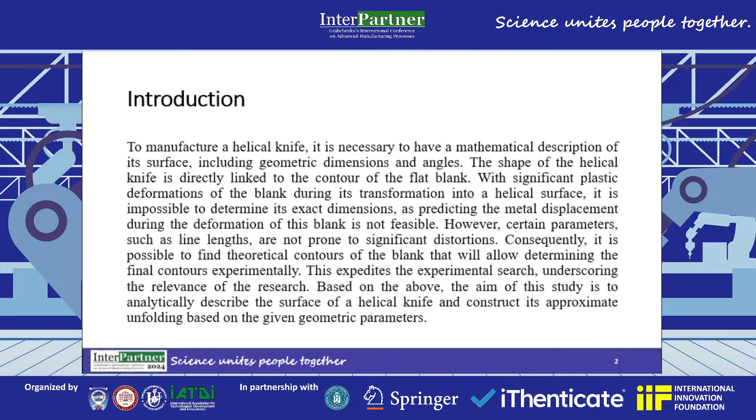According to the given geometrical parameters, we describe analytically the surface of the helical knife and construct its approximate sweep. The cutting edge of the helical knife is a helical line that convexly lies on the surface of a cylinder with radius r and has a constant inclination angle tau relative to the horizontally positioned cutting blade (figure 1). The cross-section of the knife is a straight segment inclined at an angle phi to the radial direction (figure 1b). Decreasing the angle phi deteriorates the cutting process, but increasing it also has limitations.

With the drum rotating uniformly, a layer of plant mass with thickness h moves with a constant speed v in the direction of the knife (figure 1c). Cutting of the layer starts at the top and ends near the cutting plate. As the layer is not cut simultaneously throughout its thickness, but gradually, the profile of the cut layer will be outlined in the form of an Archimedean spiral (figure 1c), shown inside a circle with radius r. Considering the thickness and sharpness of the knife, it should not touch the spiral.

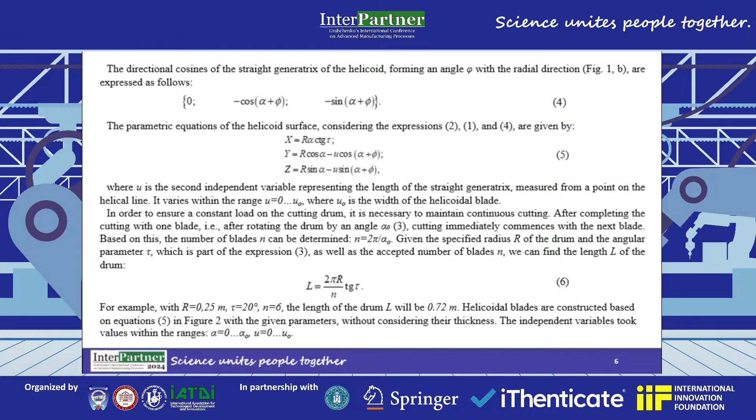To manufacture an individual blade, a flat blank is required. Its contours should be such that plastic deformations are minimal when the blank is deformed into the final product.

To find it, we assume that the length S of the outer edge of the blade, and the length of the inner edge S, as well as the width of the blade U0 on the flat blank, are equal to the corresponding dimensions of the helicoidal blade.

Its length is found using a known formula 7. The length of the inner edge of the blade can also be determined if the radius r of the inner circle is known, figure 3a.

The radius r is a side of a right angle triangle defined by two other known sides r and u0, and the known angle phi between them, figure 3a.

Equation 8. The length of the arc corresponding to the inner edge of the blade is found by multiplying the radius r by the corresponding arc angle alpha 0, formula 9.

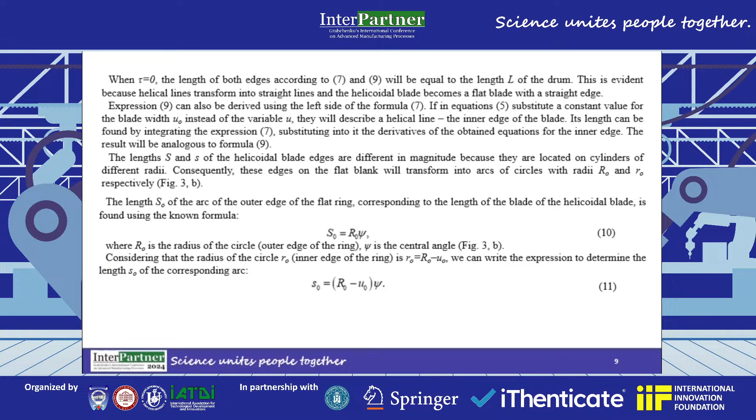In figure 3, you can see a graphic illustration for the calculation of a flat blank for the helicoidal blade: A, schematic of the blade on the drum with indication of its parameters; B, flat blank of the blade with indication of the necessary dimensions.

By equating the lengths 7 and 10, as well as 9 and 11, we obtain a system of two equations with the unknowns R0 and psi. Solving the system for these unknowns, we get formulas 12 and 13.

For this purpose, parametrical equations 5 for a direct open helicoid were initially developed, incorporating the design parameters of the blade and defining the limits of the independent variables considering the dimensions of the blade.

Formula 6 allows the determination of the drum's length based on the number of blades, drum radius, and the angle of inclination of the helical line cutting edge to the drum axis.

To determine the shape of the flat blank, the assumption was made that the length of lines outlining the contour of the blade in space and the corresponding lines on the flat blank are equal.

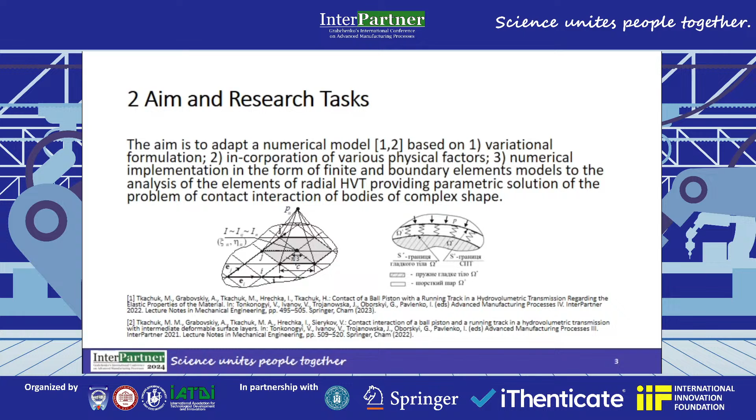A variational approach is applied to the analysis of contact interaction of bodies of complex shape, based on minimization of either the potential energy or the complementary energy. Quadratic terms need to be added in order to account for the local deformations of the intermediate surface layers.

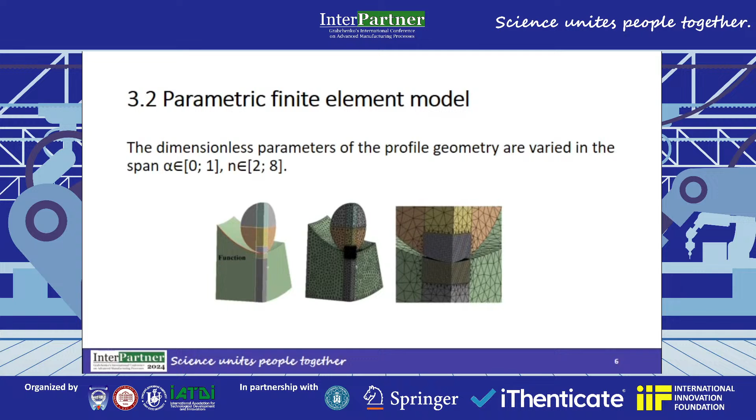The particular shape of the profile is defined by a power function chosen in the present analysis. The dimensionless parameters of the profile geometry are varied in the span for the radius between 0 and 1, and for the exponent of the power law, n, from 2, which is quadratic, to 8.

The running track profile geometry is evaluated based on the reduction of contact pressure and the equivalent stress.

For the reference case of a quadratic profile, which corresponds to n equal to 2, we can obtain the Hertzian contact, that's the case of alpha equal to 0, for which the contact is only implemented in the center and is pointwise. For growing radius of the running track profile, we can obtain a more elongated contact spot. With further increase of the radius, the contact may transform from the center to the edge of the running track.

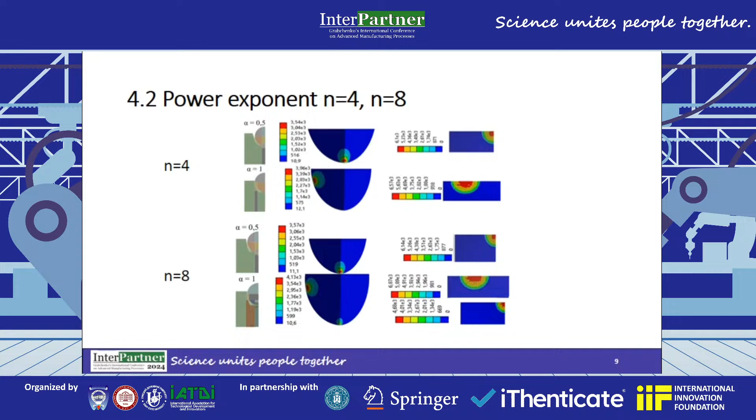For higher power exponents n equal to 4 and n equal to 8, we will obtain either a pointwise contact in the center or the edge contact.

The apparent optimum at alpha 0.5 and n equal to 2, which displays the lowest contact pressure and equivalent stress values, requires cutting the groove too deep. This will cause interference between the rotor block and the inner wall of the stator.

The feasible domain of the design parameters does not cover the entire parameter space, and hence the optimal design solution will be found somewhere on the boundary of the admissible parameter space.

To conclude the talk, we can summarize that the developed models, methods, and analysis tools for contact interaction of contacting complex-shaped structural elements have demonstrated their utility and effectiveness.

The parametric approach is based on the variable analysis of design solutions according to the strength criterion. This makes it possible to validate progressive technical solutions of these structures. The developed analysis methodology can be applied to other machine components that transmit high loads through the contact interaction of complex-shaped working surfaces.

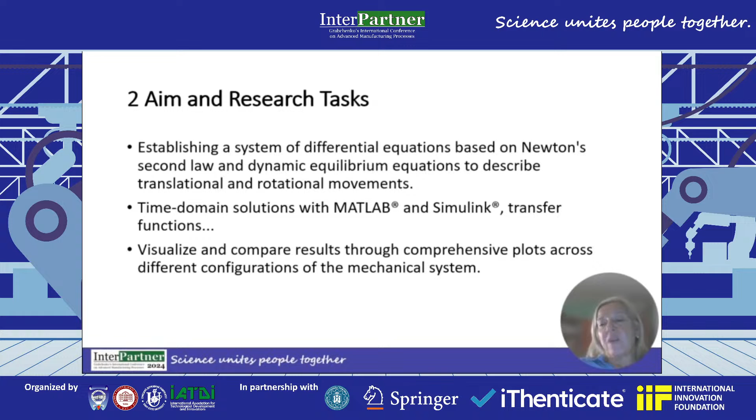At the end, we visualize and compare results for comprehensive plots across different configurations of mechanical systems.

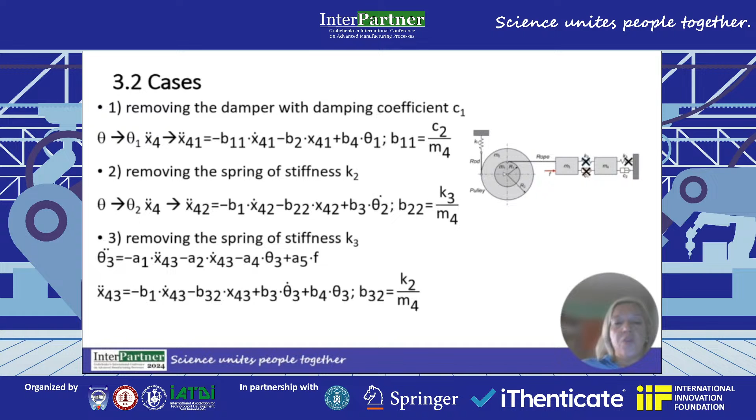After that, we integrated all these equations in the Simulink environment, making a model with zero initial conditions and with some blocks which are induced to connect MATLAB and Simulink with these Simulink blocks for each of the cases for theta and each of the cases for x.

In order to get angular displacements in degrees, we have also induced gains for this.

After that, we converted the differential equations from the mathematical model into a complex model in order to obtain the transfer function. We have used Laplace transformations on the left and right sides, and the transfer functions of the system are calculated.

After that, some characteristics of these transfer functions are used, properties such as poles, zeros, and gain factors determined in MATLAB. The dynamics of the system in terms of stability is also tested in MATLAB, and we have used the Nyquist and Bode stability criteria.

Running the MATLAB scripts as the result produces some plots for all presented cases. This is the Pulley rotation displacement.

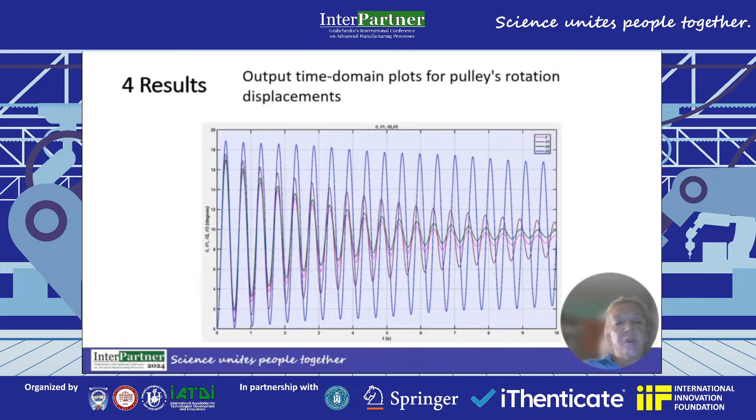The transfer functions for all observed systems are also calculated, and we can see that the most complex expressions are for the initial case and for case 3, where the denominators are polynomials of the fourth degree, and accordingly both systems have 4 poles. In cases 1 and 2, we have more simplicity and a polynomial of the second order.

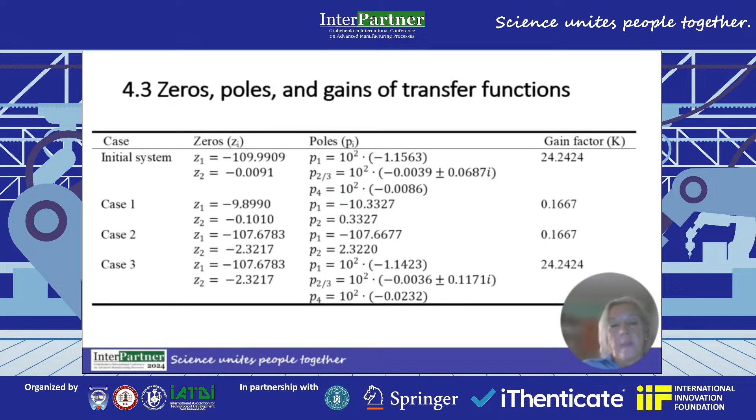Finally, due to the fact that Nyquist curves do not include the critical points, we can conclude that all the systems will be stable after closing the feedback loops, with one or both margins. We can see here on the Nyquist diagram, gain and phase are infinite on each both diagram, which means that the system will always be stable no matter what the gain increase is.

For the initial system, the bode phase plot crossover frequency is 8.33, and for case 3 it is 12.6 degrees. For the system in case 1, the bode magnitude plot displays 26.3 decibels for gain margin, with the gain crossover frequency equal to 0.

Finally, we have some conclusions. We have various configurations of the system investigated by deriving mathematical models for each case and simulating their time domain responses using MATLAB and Simulink. We have explored the impact of removing elements such as springs and dampers on system dynamics. We have also conducted some analysis in the complex domain, and all the systems remain stable even under conditions of increased gain, when all the feedback loops were closed.

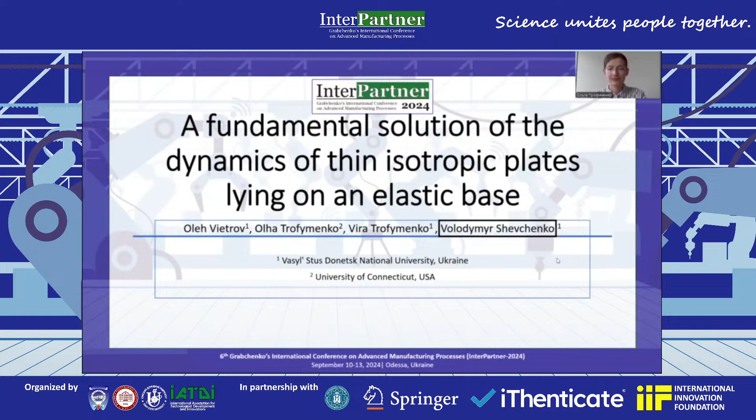Thin-walled structural elements in the form of plates are widely used in modern mechanical engineering, construction, shipbuilding, and aviation, and the requirements for the properties of such structures are constantly becoming more complex. Structural elements can be made from modern anisotropic materials with special mechanical properties.

We have h, the thickness of the plate, which is small compared to the dimensions of the base. We assume that the thickness of the plate is constant.

According to the specified criterion, plates can be conditionally divided into the following groups: membranes, stiff plates, moderately thick plates, or thick plates.

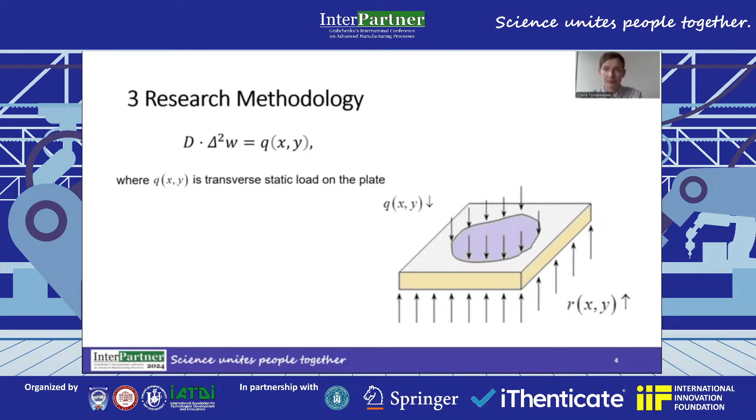Let's demonstrate an algorithm for constructing a fundamental solution to the equation of the Pasternak model. The algorithm proposed in this work for constructing the fundamental solution of plate dynamics is based on the joint use of the Fourier and Laplace integral transforms and the theory of special hypergeometric functions.

An effective method for constructing a fundamental solution to a partial differential equation is the method of integral transformation. Since equation one depends on 3 coordinates, in accordance with the methodology to solve, we will use the formula for the direct Fourier transform and also for the direct Laplace transform, as you can see on this slide, for F and L. The use of integral transformations allows us to not overcomplicate the mathematical specifics of the delta function.

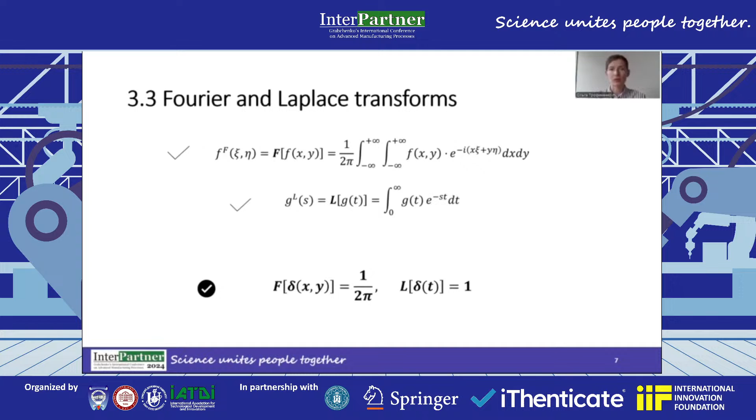Why? Because we have this perfect result. In this case, for the Fourier transform, in case of the delta function, we have just 1 over 2 pi. And for Laplace, we have just 1. So if you have this result in relation to equation 1, Pasternak model, basically, as I said before, the transformant of the dynamic deflection function of a thin plate will have the form like the first formula on this slide. But basically, we will move to the next formula at the center of the slide for WRT.

And we can see this representation using the inverse Laplace formula. And also we have the improper integral as well as the J Bessel function of order alpha. And here also, interesting is that R's are polar coordinates in this case.

If you use for the Bessel function the power series and also the Efros theorem, we will have the next representation for WRT. Again, we have the inverse Laplace transform, but it seems like a more complicated structure in this case. So we'll use the Efros and Danilevsky formula, famous formula. Why? Because we have the same structure in our formula and at the left side for Efros Danilevsky. And basically we will have the gamma and the R, and we will have the Bessel function again at the right side.

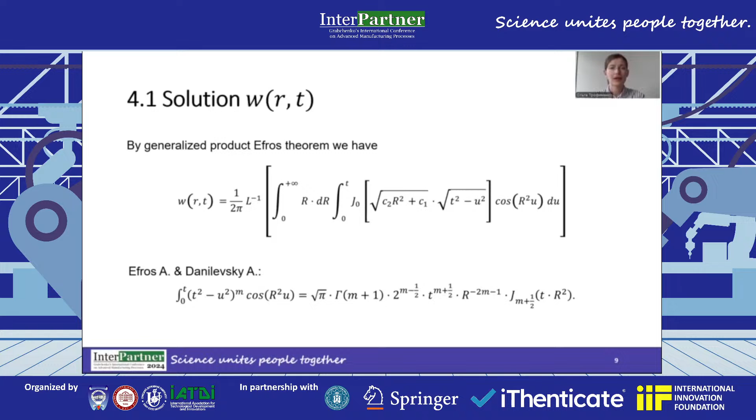Also, it's interesting that we can use a technique for calculating improper integrals, and we are interested in a special expression like at the left side here. So for this expression, we would like to use the improper integrals specifics, and we will have at the right side the most interesting part here. Basically, it's the Meijer G function now.

Also, it's interesting that in some case, when C sub 1 is 0, it means the lack of an elastic base, we will get this solution. Like we can see, it seems a more simple solution for R, for WRT, but it's only for the case when C sub 1 is 0, and it's a famous result from Zhigalko and Sadykova. So in this more simple case, our formula works.

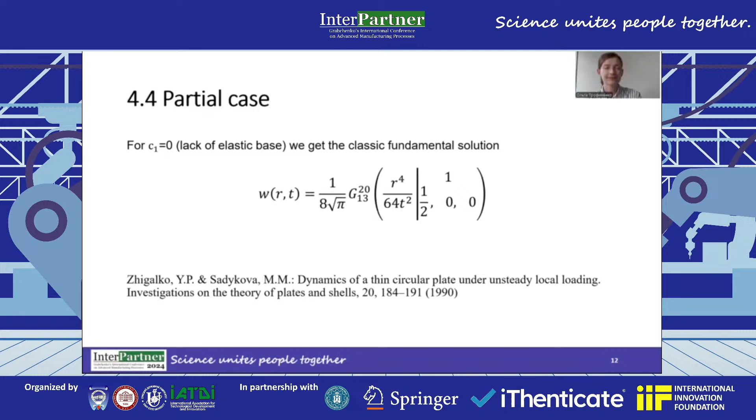As a conclusion, the fundamental solutions to the equations of dynamic deflection of thin isotropic plates lying on an elastic base were obtained. We used the method of integral transformations of Fourier and Laplace, the theory of special functions, and the method of analytical calculation of improper integrals by Maillard.

Also, at the end of our presentation, we would like to say that the presented work is a development of the methodology of academician Volodymyr Pavlovich Shevchenko, and this paper is one of his latest studies. Volodymyr Pavlovich passed away this April, and we would like to dedicate this presentation to him. Thank you very much for your attention.

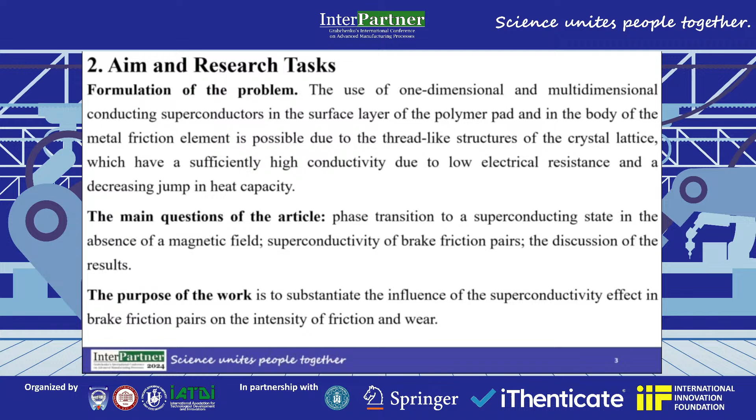In this case, the heat of transition is zero. Thus, the transition of the superconducting state in the absence of a magnetic field is a phase transition of the second kind. From Formula 1 given in the article, one can obtain the values of heat capacity in the superconducting and normal states. This relationship is confirmed by experiment.

The thermal diffusivity was determined by dependence 2. With a jump in heat capacity in the superconduction, the thermal diffusivity will increase by 2.5 times.

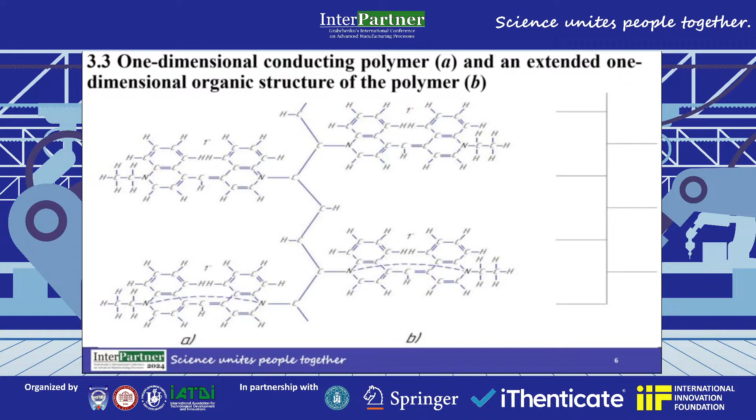According to the band theory of solids, the state of an electron is characterized not by any, but by quite specific discrete energy levels, similar to the electron levels of an isolated atom. These discrete levels have an important feature. They fall into groups called zones.

Based on the results of theoretical and experimental studies of the state of superconductivity in friction pairs of braking devices, it was established that the entire body of the metal friction element and the surface layer of the polymer lining have superconductivity. A special role is given to the so-called thread-like structures, which have a high thermal conductivity coefficient, 3-5 times higher, due to low electrical resistance.

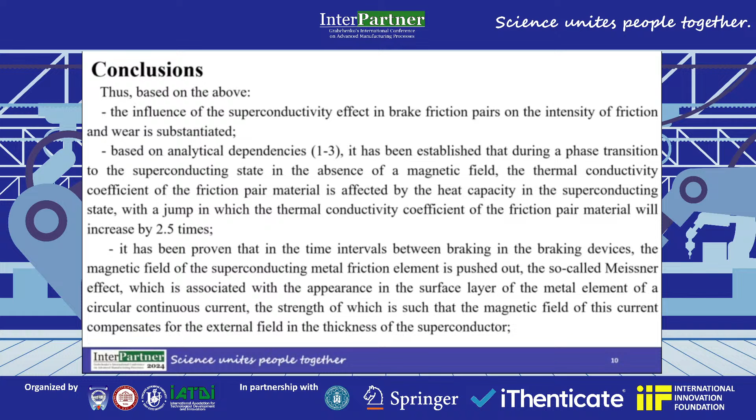Thus, as shown by the studies presented in this paper, the superconductivity of a metal element is affected by the deformational and polarization states of the crystal lattice and the electron system of the metal, which lead to interelectronic attraction and, as a result, contribute to the establishment of a superconducting state.

The study of superconductivity in friction pairs in braking devices will subsequently lead to a recommendation to reduce the wear of friction materials of friction pairs by 20%, which will lead to their more efficient operation.

The results of theoretical and experimental studies can be used in design offices and factories, as well as in further developments of friction pairs of brake friction units.

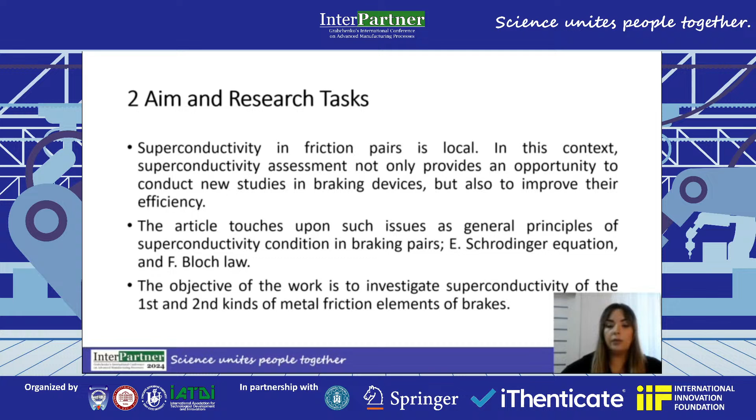So what are the aim and research tasks? Superconductivity in friction pairs is local. In this context, superconductivity assessments not only provide an opportunity to conduct new studies in braking devices, but also to improve their efficiency. The article touches upon such issues as general principles of the superconductivity condition in braking pairs, the Schrödinger equation, and the Bloch law. The objective of the work is to investigate superconductivity of the first and second kinds of metal friction elements of brakes.

Large currents will contribute to the emergence of the local superconducting state of the metal friction element. On the inner surface of the ring, magnetic lines will also appear.

So, what are the general principles? Superconducting substances are prone to heat transfer processes and are capable, for example, of strong cooling with relatively small heat losses. When the temperature of the superconductor becomes equal to the critical temperature, the transition to the normal state takes place and the thermal capacity begins to change according to the linear law.

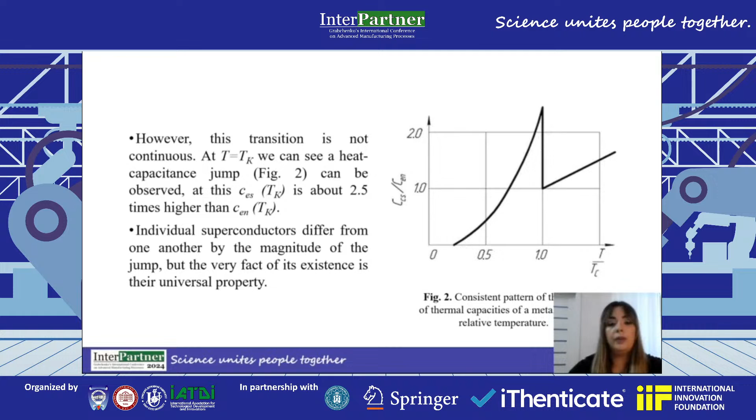However, this transition is not continuous. In figure 2, we can observe the heat capacity jump. Individual superconductors differ from one another by the magnitude of the jump, but the very fact of its existence is their universal property.

Here are some conclusions. The electrothermomechanical friction interaction in the brake pairs is considered, in which an electric current is generated, which contributes to the formation of magnetic annular lines around the cylindrical metal ring, presented as drum and pulley rings. Theoretical studies of the superconductivity of metallic friction brake elements have allowed us to identify two groups of superconductors and to describe different interactions within the working surface.

The state of superconductivity of the first and second kind of metal friction elements of braking devices is estimated. The obtained results can be applied in the development and optimization of friction systems, in particular in the study of shoe brakes of disc-drum type drilling winches.

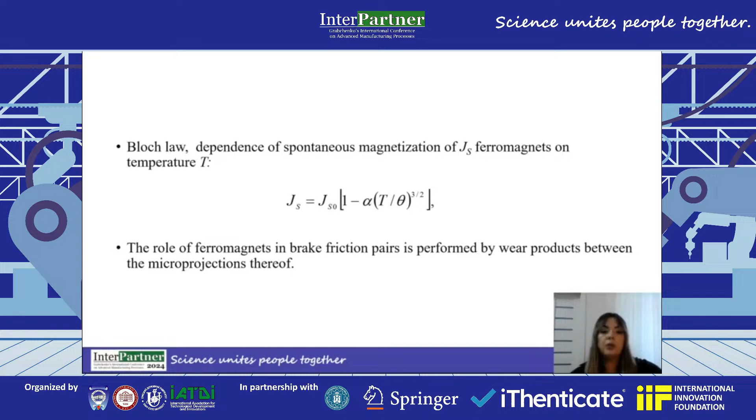Here you can see Bloch's law, the dependence of spontaneous magnetization of ferromagnets on temperature. The role of ferromagnets in brake friction pairs is performed by wear products between the microprojections thereof.

In the long-term braking mode of the drum brake, superconductors of the first kind lose superconductivity in the field, when the field jumps into the body of the drum frame, and the latter, in all its volume, goes to the normal condition. At the same time, the specific magnetic moment also decreases by a jump.

And the results: for space-limited systems, the solutions exist only for discrete energy values. These values are numbered as integral quantum numbers, and each of them corresponds to a wave function.

The Bloch law describes the dependence of spontaneous magnetization of ferromagnets on temperature and is well respected at temperatures well below the Curie point. The decrease in magnetization with increasing temperature is explained by the disorder of the ordered orientation of magnetic moments of matter under the influence of thermal motion of particles.

The role of ferromagnets in friction pairs of brakes is performed by wear products between microprojections.

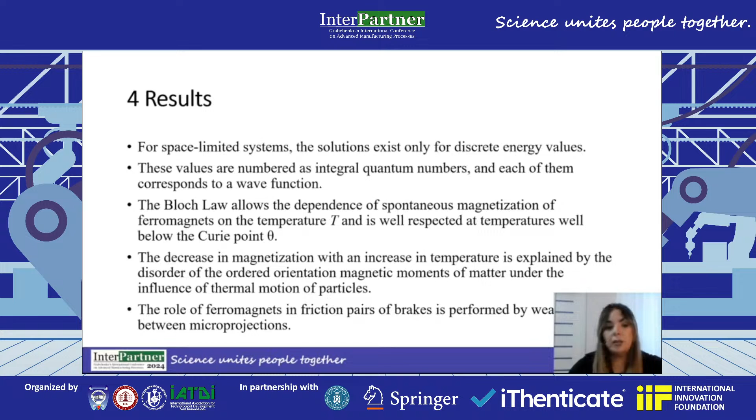The results of theoretical studies of the state of superconductivity of first and second kind at low and high temperatures of metal friction elements of brakes have revealed the following. The first group includes so-called superconductors of the first kind, characterized by positive surface energy. Negative surface energy characterizes the superconductors of the second group.

Third: the lower layers located on the non-working side of the surface experience internal interaction between the paired Cooper electrons and the crystal lattice.

Next, electric, magnetic, and thermal gradients decrease in size from external to internal effects. Finally, the presence of different types of contacts and their transformation, connected with electrical resistance, promoted superconductivity of the local character of the first kind.

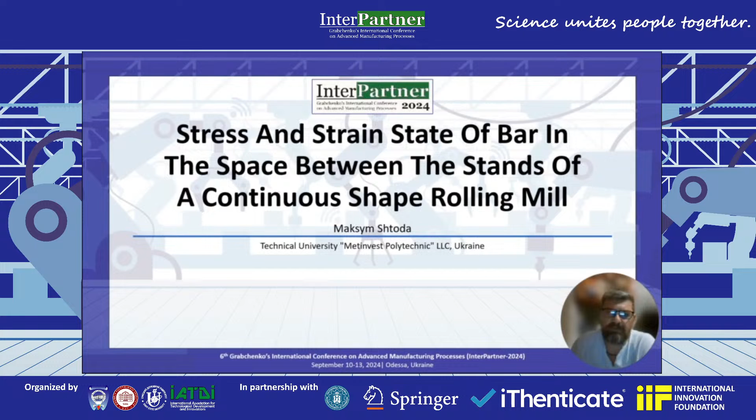The continuous rolling method is currently the most common in producing long products. It is known that the distinguishing feature of continuous rolling is the simultaneity of deformation in several successive stands of the mills. It is important to note that in many areas of rolling production, these features play a positive role.

At the same time, in section rolling, on the contrary, the presence of strip tension between a stand or groups of stands leads to a noticeable decrease in the accuracy of rolled products.

Therefore, they try to roll the section profiles in a mode in which the strip tension between the stands is minimized. For several reasons, such adjustment of equipment is extremely difficult in practice, which is most true for high-speed wire blocks.

Here the main question arises in the practice of section rolling: how exactly does the setting of the mill's finishing block affect the rolling speed mode and the tension mode of the bar?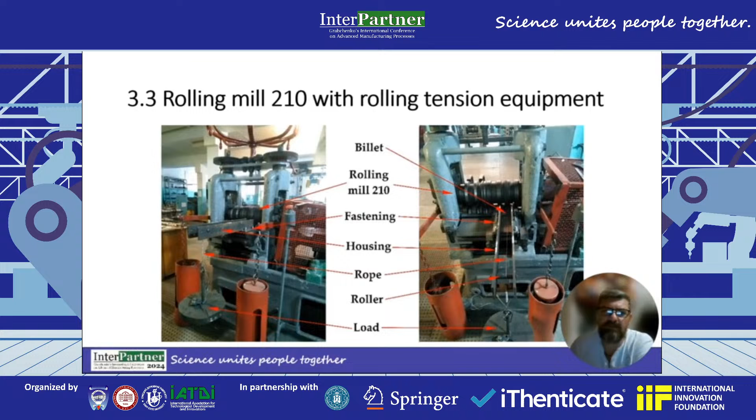To test the adequacy of the finite element model of section rolling with front tension on the laboratory mill, a practical part of the experiment was carried out. Round workpieces from lead were used with a nominal diameter of the cross section of 5.06 to 7.71 millimeters. The front tension was created using a block load mechanism shown in this figure.

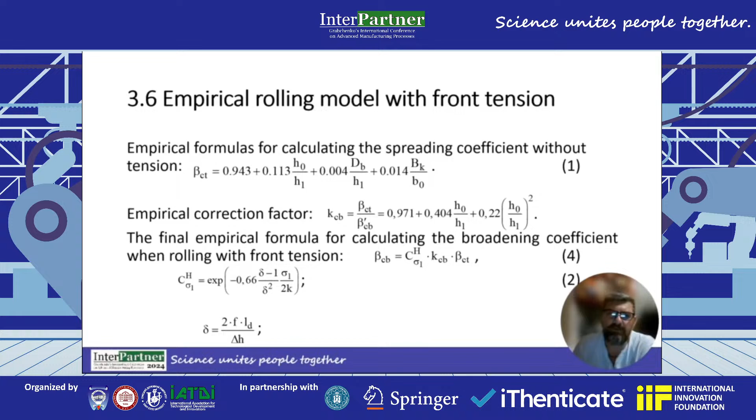So, with an increase in the kinematic stretching, the width of the wire rod decreases and the longitudinal stress tension increases. In all the studied cases, the dimensions of the wire rod do not meet the requirements of the standard, either in terms of ovality or width accuracy. To obtain a wire rod of the required accuracy, it is necessary to adjust the reduction mode.

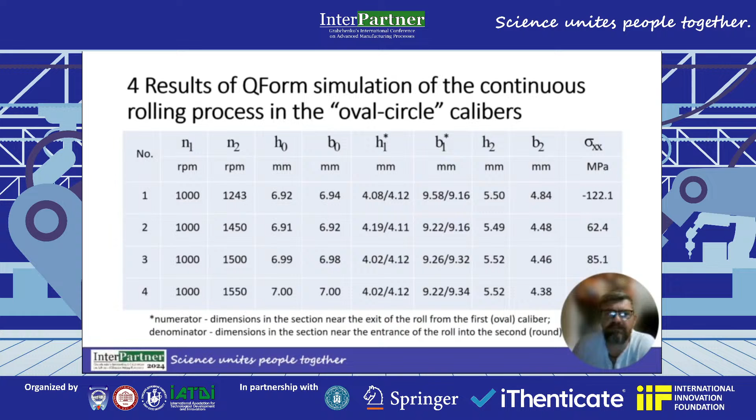It is important to know that changing the gaps in the wire rod block not only changes the size of the metal, but also changes the force interaction between the stand and the strip. This interaction is typically not considered in existing engineering calculation methods. At the same time, the proposed mathematical model of continuous section rolling, which was implemented in QForm, automatically considers the force influences from all rolls of the system on the deformed metal.

The subsequent study of the effect of changing the setting of the pre-finishing and finishing stands on the wire rod showed the high efficiency of this method. If a round profile with a diameter of 6.9 millimeters is used as a roll for an oval caliber, and at the same time the gap in the finishing pass is reduced by 0.1 millimeters and the gap is increased by 0.4 millimeters in the pre-finishing pass, then the dimensions of the wire rod will change to 5.4 millimeters. A further increase in the gap in the pre-finishing oval by 0.4 millimeters makes it possible to obtain a wire rod with the tolerance range.

5.4 millimeters in the hot state, or 5.36 millimeters in the cold state. This is ultimately achieved by changing the setting of the last two stands of the block, obtaining a high quality wire rod with a minus tolerance on the diameter.

Analysis of the calculation results shows that a change in the gap between the rolls of the last two stands of the wire block can lead to the appearance of longitudinal tensile or compressive stress in the metal between the stands. Thus, the results of theoretical studies showed that a change in the size of the gaps of the rolls significantly affects not only the dimensions of the profile after rolling, but also the stress state of the rolled metal in the space between the stands.

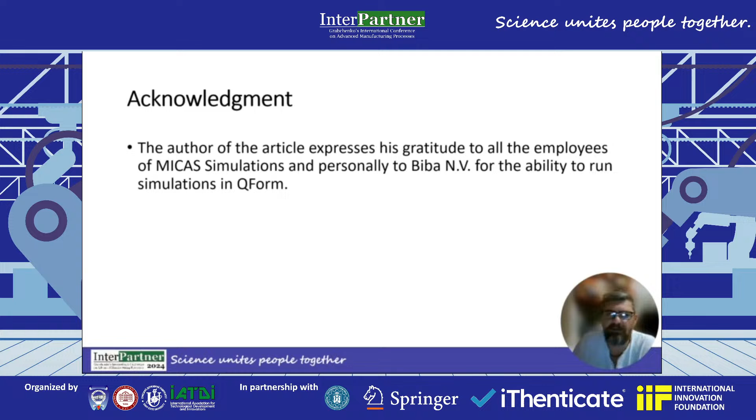The author of the article expressed his gratitude to all the employees of MICAS Simulations, and personally to Nikolai Biba, for the ability to run simulation in QForm. Thank you for your attention.

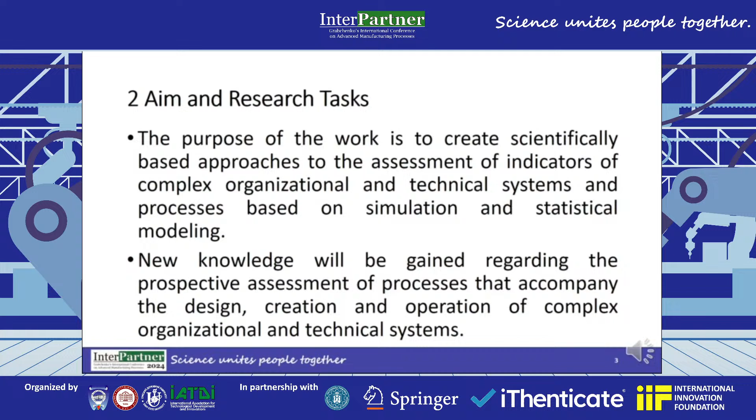Research methodology. Complex technical systems were studied as complex non-linear systems, the state result of processes, relationships between them that can change qualitatively and quantitatively when the external environment changes.

To describe them, it is proposed to use non-linear mathematical equations. The main idea of the research is to create new methods and improve existing approaches to decision making at the stage of the life cycle when using system-wide evolutionary transdisciplinary models that take into account the cross-industry interactions of complex organization and technical systems during design, manufacturing, and operation, depending on the dynamic change of internal and external environment.

Formative and informative measurements of process capabilities. The work develops methods for assessing the capabilities of interoperability of process of complex organizational and technical systems following the requirements of the ISO standard. A process is defined as a sequence of interoperability procedures, operations, or steps that consume resources and transform inputs into outputs.

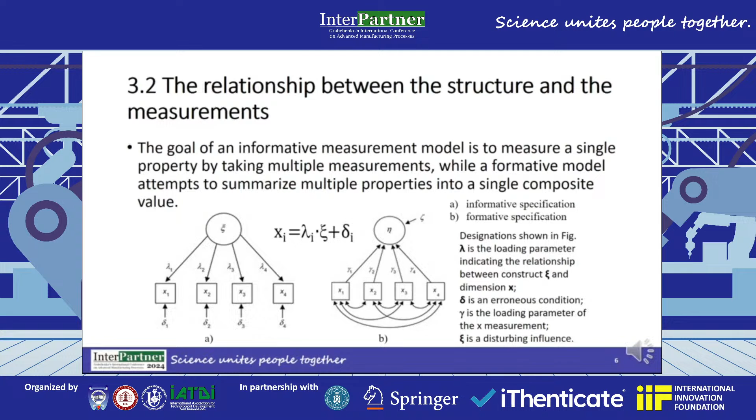The relationships between the structure and the measurements. The goal of an informative measurement model is to measure its single properties by taking multiple measurements, while formative models attempt to summarize multiple properties into a single composite value.

The relationship between a construct and its dimensions. The measurement system can be structured into a set of levels, the achievement of which is expected to be achieved by process control. We will assume that process control is described by a linear differential equation.

The results. A process capability level is characterized by one or more properties that represent the formative dimensions of the process capability. Process properties are necessary to construct process capabilities. Process properties are demonstrated by corresponding process property results that represent informative measurements. The properties of the process will be described by a system of differential equations.

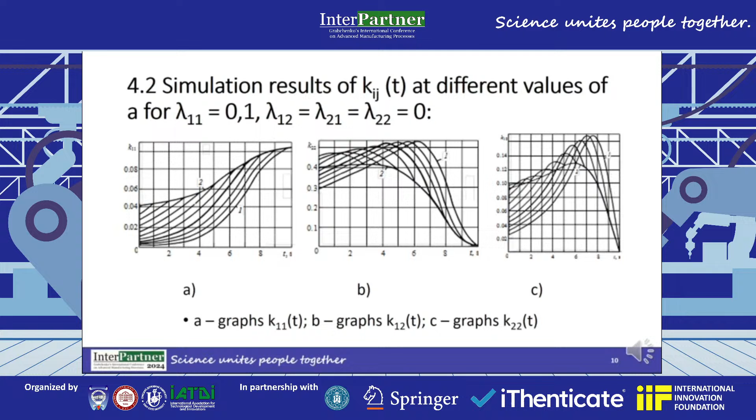This slide shows the functional simulation results of k ij (t) values at different values of lambda 11, lambda 12, lambda 21, lambda 22. And then you can see a picture: A graph K11, B graph K12, C graph K22.

The robustness of the composite value is assessed by uncertainty analysis and sensitivity analysis. Uncertainty analysis examines the degree of uncertainty in the input factors, such as the distribution of values across the structure of composite dimensions and the impact on the composite value.

Sensitivity analysis tests the extent to which each individual source of uncertainty contributes to the final variance. Sensitivity analysis can be performed based on process properties, incorporating weights into a composite measurement, such that most compensation models require a sensitivity analysis for the weights where the weight ranking method must be specific.

Proposed criteria for evaluation: the efficiency of the application of conceptual schemes of the system of standards at enterprise, depending on the possibility and directions of activity.

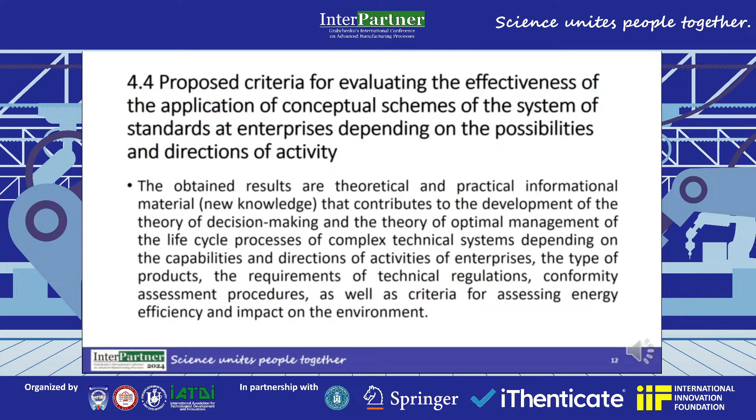The obtained results, the theoretical and practical informational materials, new knowledge that contributes to the development of the theory of decision making and the theory of the optimal management of the life cycle process of complex technical systems, depending on the capabilities and directions of activities on enterprise, the types of products, the requirements of technical regulations, conformity assessment procedures, as well as criteria for assessing energy efficiency and impact.

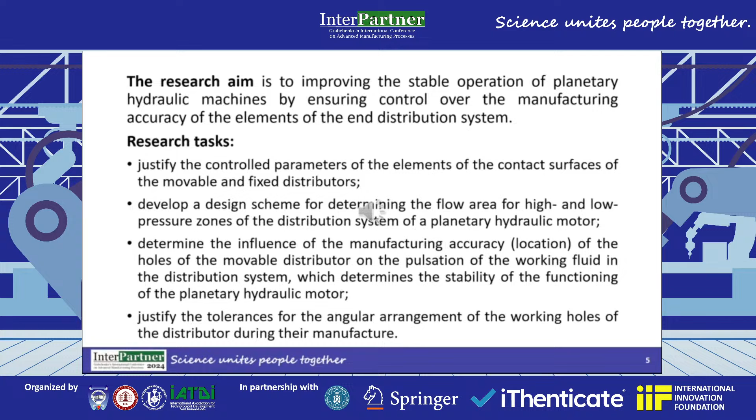Research methodology. The end liquid distribution system of a hydraulic motor planetary type is represented by movable and fixed distributors. On the contact surface 1 of the movable distributor, there are working openings 2 necessary for the supply and discharge of working fluid to the working chambers, as well as discharge openings 3, used as working ones.

To balance the forces arising between the distributors during operation of the distribution system, there are relief holes 4 on the contact surface 1. The operation of the end liquid distribution system is to form a rotating hydraulic field of the working fluid supplied and discharged to the working chambers.

A rotating hydraulic field is formed by sequentially combining working holes 2 of the movable distributor with holes 6 and 7 of the fixed distributor, located on contact surfaces 1 and 5. When the movable distributor rotates, its working holes overlap with the distribution holes of the fixed distributor. The overlap area of all holes determines the total flow section area of the hydraulic motor's liquid distribution system.

In this case, deviations from the accuracy of the angular location of the working and distribution holes cause pulsation of the flow section, and therefore affect the stability of the hydraulic motor planetary type as a whole. Pulsations of the total flow section area cause pulsations of the working fluid pressure in the end distribution system of the hydraulic motor planetary type.

Elimination of pulsations of the total flow section area and working fluid pressure is carried out both at the design stage and the manufacturing stage. At the design stage, this issue is resolved by using the unloading holes of the movable distributor as working holes, with their subsequent rational displacement. At the manufacturing stage, the stability of the total flow section area is ensured by monitoring the accuracy of the angular location of the working and distribution holes of the distributor.

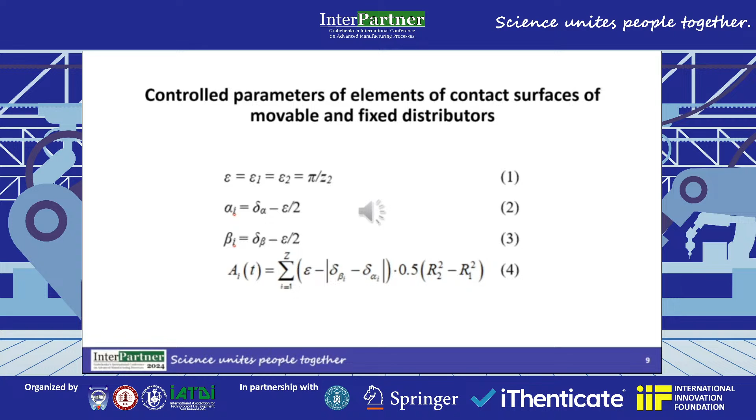The main angles for monitoring the manufacturing accuracy of the location of the distributor holes are the opening angle of the holes, epsilon, and the angles of location of the holes of the movable, alpha, and fixed, beta, distributors. Justified controlled parameters of the elements of the contact surfaces of the distributors made it possible to develop a design scheme for determining the flow area for the high- and low-pressure zones of the distribution system.

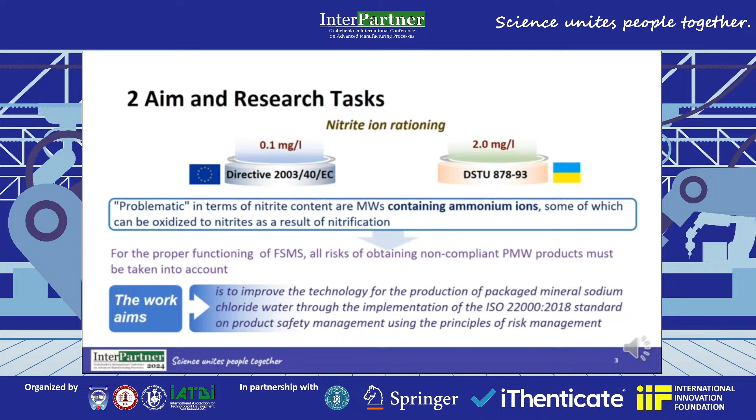The work aims to improve the technology for the production of packaged mineral sodium chloride water through the implementation of the ISO 22000 standard on product safety management using the principles of risk management.

The object of the study was a plant for the production of packaged highly carbonated sodium chloride mineral water, which is packaged using groundwater from 3 wells.

The study consisted of 5 parts. The first stage is selection of the object of research. The second, analysis of monitoring data of the main chemical composition. The third, study of packaged mineral water production technology and development of proposals for its improvement. The fourth, formation of a HACCP team and identification of hazardous factors of production. The fifth stage, development of a system for monitoring mineral water safety indicators.

Mineral water from the wells has an increased ammonium content, some of which can be converted to nitrite ions during packaging. Therefore, the risk of exceeding the content of nitrite ions in the finished product was studied.

The basic chemical composition of mineral waters, mineralization and macrocomposition, is stable. However, in wells number 20 and 21, single exceedances of the conditioned fluoride content were recorded.

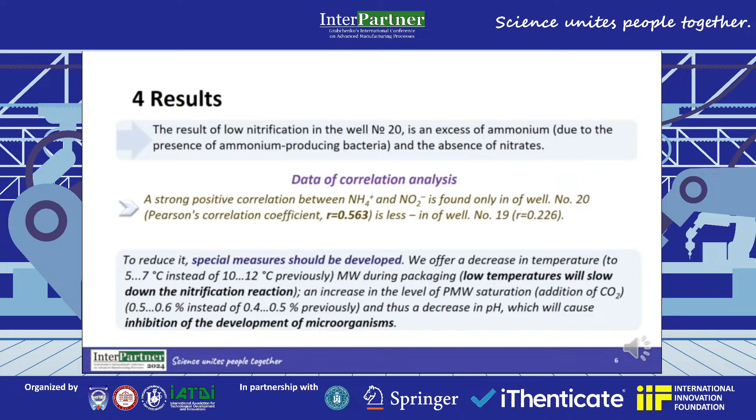To predict trends in change in indicators, a linear approximation function of the following form was used. Based on the results of the calculation of the approximation function of mineral water indicators, it was determined that the fluctuation in the next 20 years should be within the norms of the approved conditions.

As part of the study, the results of low nitrification in well number 20 show an excess of ammonium due to the presence of ammonium-producing bacteria, and the absence of nitrates.

The HACCP team identified the hazards of packaged mineral water production. Then they conducted a risk assessment using the failure mode and effect analysis method. The probability and effect range from 1 to 4.

The HACCP team identified the following 3 critical control points: water intake from the source, saturation by carbon dioxide, and capping bottles.

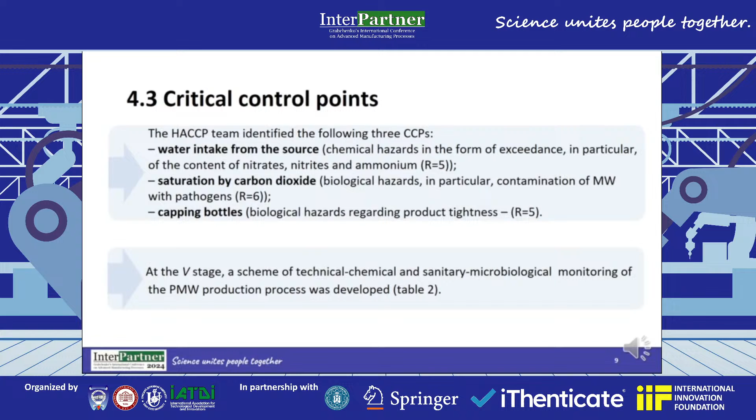At the fifth stage, a scheme of technical, chemical, and sanitary microbiological monitoring of the packaged mineral water production process was developed, shown in Table 2. Table 2 lists the critical limits, monitoring procedures, and corrective action for each critical control point. This information was used to develop the operational prerequisite programs and draw up the HACCP plan.

Monitoring of the safety and quality of packaged mineral water can be effective only if there is an implemented food safety management system. Using the principles of HACCP in accordance with ISO 22000 and risk management, an analysis of risk of hazardous production factors was carried out.

The assessment was carried out. Three critical control points of the technology were identified. Their critical limits, monitoring procedures, and corrective actions were developed.

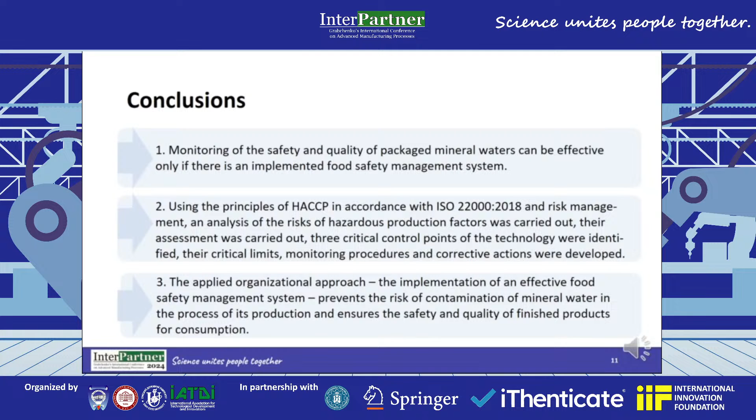The applied organizational approach, the implementation of an effective food safety management system, prevents the risk of contamination of mineral water during its production and ensures the safety and quality of the finished product for consumption.

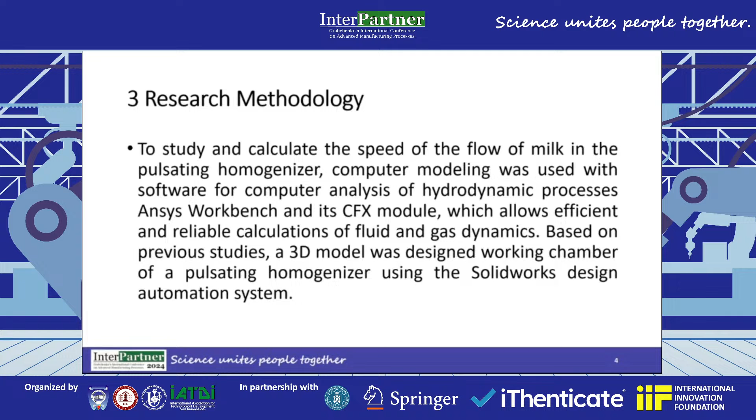To study and calculate the speed of the flow of milk in the pulsation homogenizer, computer modeling was used with software for computer analysis of hydrodynamic processes, Ansys Workbench, and its CFX module, which allows efficient and reliable calculations of fluid and gas dynamics. Based on previous studies, a 3D model of the working chamber of a pulsation homogenizer was designed using the SolidWorks design automation system.

Subsequently, the model of the working chamber of the homogenizer was transferred to the CFX module, which is located in the ANSYS Workbench software. To obtain more accurate calculated values of gas and liquid dynamics, a new version of the ANSYS Meshing grid system was used.

For the convenience of research, the calculation was carried out for two different zones: the zone of milk flow through the channels in the shock pistons, and the zone of emulsion flow in the opening between the working chamber and shock piston.

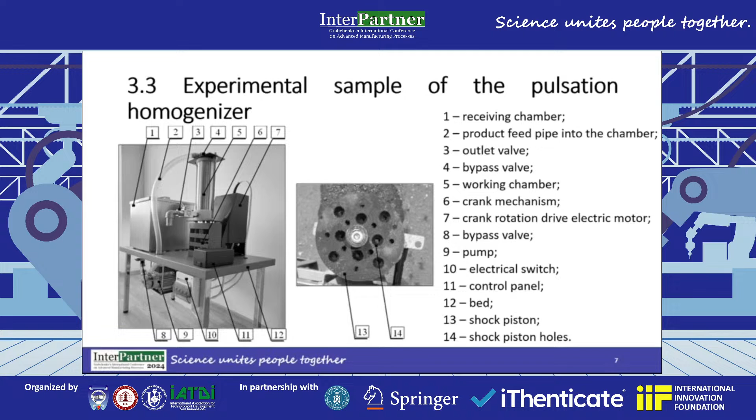The main striker piston is rigidly fixed to the rod, and the second shock piston is connected to the first piston by means of spring elements.

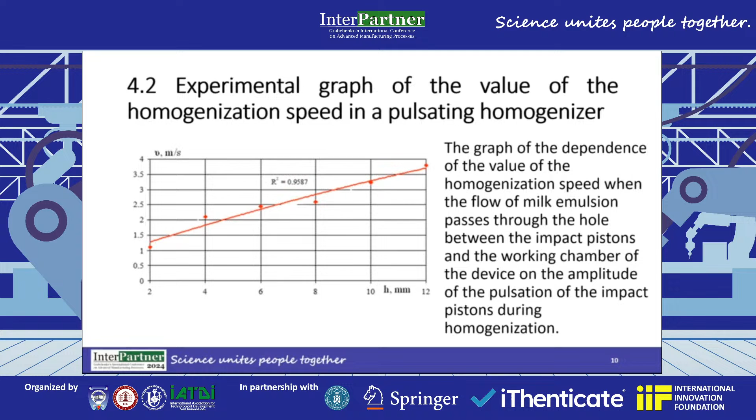Therefore, in the future, we decided to accept the optimal data for carrying out calculations, namely the pulsation frequency of 55 Hz and the pulsation amplitude of impact pistons of 10 mm.

The next stage of the research was to determine the milk flow speed at the exit from the holes of the first and second shock pistons.

To verify the analytically obtained data, experimental studies of the pulsation homogenization process were carried out to determine the degree of dispersion of milk fat.

The obtained data were compared with the data of homogenization in a Wolff homogenizer. The results show that the diameter of milk emulsion fat particles is smaller when using pulsation homogenization. That is, the quality of homogenization in the experimental homogenizer became higher by 90%.

At the same time, the uniformity of the fractional composition after processing in the experimental homogenizer is no less than that of the reference Wolff homogenizer.

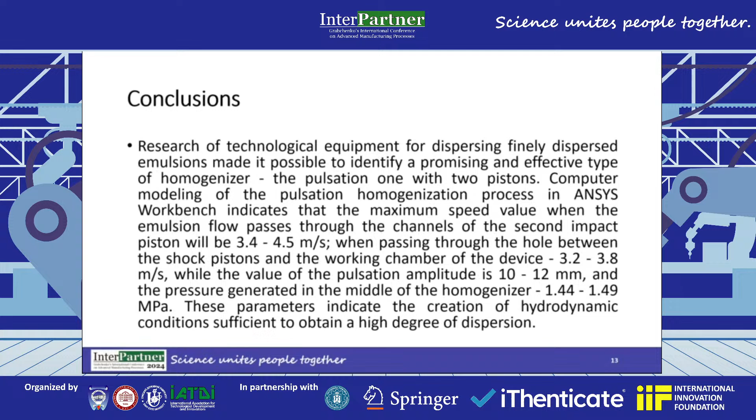These parameters indicate the creation of hydrodynamic conditions sufficient to obtain a high degree of dispersion. The conducted experimental studies showed that, firstly, the diameter of fat particles of milk emulsion is 0.18 micrometers, and secondly, the uniformity of the fractional composition after processing in the experimental homogenizer is no less than that of the reference Wolff homogenizer. The conducted studies prove that the experimental pulsation homogenizer with 2 pistons is not inferior to the reference Wolff homogenizer in terms of homogenization quality.

Thus, the experimental homogenizer is promising for replacing Wolff homogenizers and requires further in-depth research in order to determine energy consumption and introduce it into production. Thank you for your attention.

Dear colleagues, your attention is presented to the work called Simulation of Process in Composite Materials under Thermometrical Control, taking into account their heterogeneity.

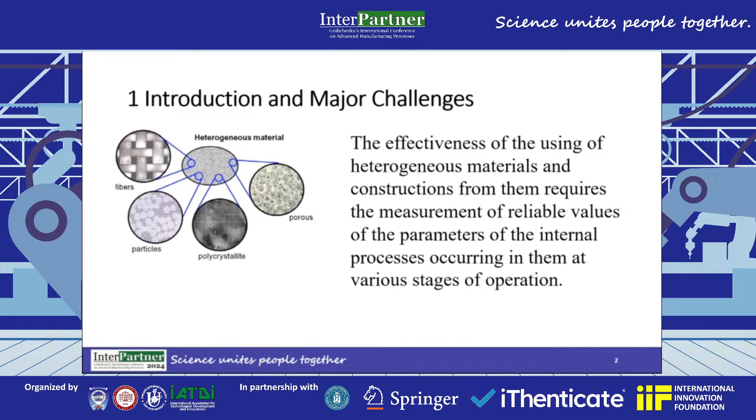The effectiveness of using heterogeneous materials and constructions from them requires the measurement of reliable values of the parameters of internal processes occurring in them at various stages of operation.

In this work, we consider the acoustic infrared thermometric method of defectoscopy of products made of non-metallic heterogeneous materials, in which thermal energy is generated at defects in the structure under the influence of vibration, which is primarily due to the dissipation of vibration energy in the place with structural defects.

It is also possible to note the specifics of using this particular method of non-destructive testing, as well as the physical phenomenon manifested in non-metallic heterogeneous materials during the vibration effect on them, which have not been fully studied for their particular application until now.

The solution of such problems as the development and improvement of methods for measuring parameters of processes occurring in composite materials must be performed with knowledge of specific theories of mathematics, taking into account the heterogeneity of materials.

During the passage of an acoustic wave through the heterogeneous material, it interacts with various features of the structure. This causes changes in characteristics of the acoustic wave itself, such as absorption, scattering, speed, amplitude, frequency, and accordingly affects the dissemination of acoustic fields.

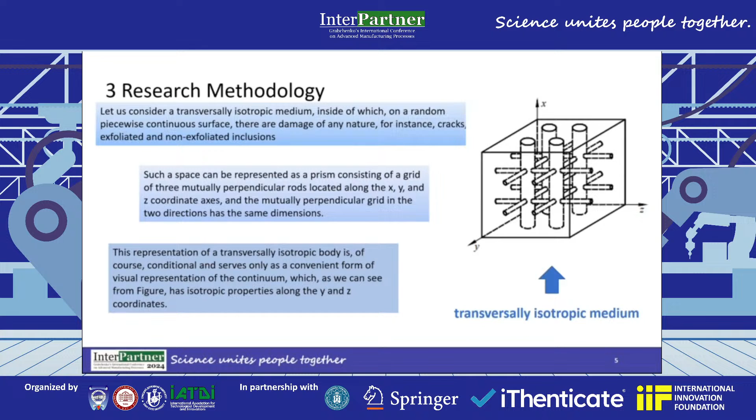It is necessary to simultaneously determine the temperature and deformation fields. Let us consider the transversal isotropic space, inside of which, on a random piecewise continuous surface, there are damages of any nature, for instance, cracks, delaminations, or non-exfoliated inclusions.

Components of stress and displacements are described by equation 1, and conditions of equilibrium are described by equation 3, and the heat conduction by equation 4. Unlike the classical heat conduction equation, equation 4 contains terms that connect the temperature growth with the rate of change in the size of the deformable body.

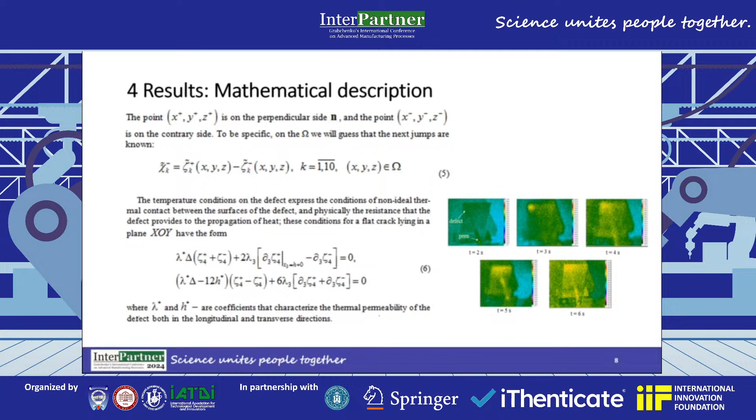The temperature conditions on the defect express the conditions of non-ideal thermal contact between the surface of the defect and, physically, the resistance that the defect provides to the propagation of heat. These conditions for a flat crack lying in the plane XOY have the form of equation 6.

The non-local theory of thermoelasticity has a significant impact on all parameters. Most of the examined works were developed in such a setting where the physical and mechanical characteristics of the material were taken into account such that they did not depend on the temperature.

Nevertheless, for the comprehensive analysis of the characteristics of materials, it is necessary to ensure the connection of thermoelastic fields, so it is necessary to simultaneously measure the temperature and deformation fields.

The article deals with the transversal isotropic space, inside which structural defects of any nature are located on an arbitrary piecewise continuous surface. The mathematical model of the thermomechanical process in non-metallic heterogeneous materials, while their defect is detected by the acoustic infrared thermometric method, was developed, distinguished by considering the connectivity of fields of mechanical and thermal nature, taking into account the heterogeneity of the material structure.

It is possible to minimize the problem to solving a system of singular integral equations and obtain the distribution of temperature fields in the vicinity of structural defects, such as cracks and delamination, in non-metallic heterogeneous materials. The following works of the authors will be devoted to this issue.

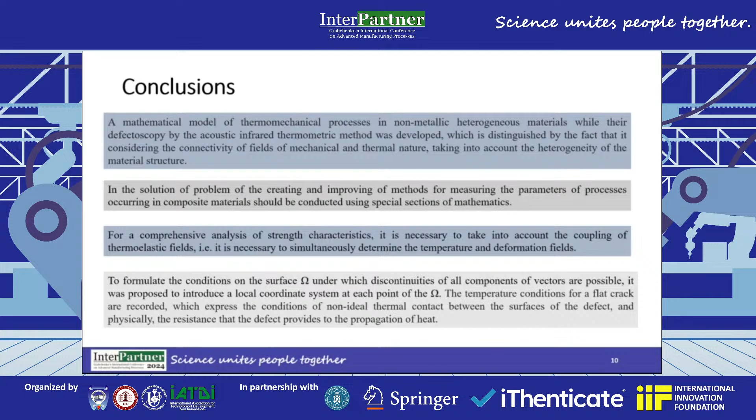The temperature conditions of a flat crack are recorded, which express the condition of non-ideal thermal contact between the surface of the defect and, physically, the resistance that the defect provides to the propagation of heat.

Thank you for your attention.

Please start. Please start, Slavomir. Slavomir, you can start. Vitalii, can you hear me? I hear you. Slavomir, please start the session. Okay, so...

Thank you very much for all of the presentations. It makes me impressed by how actual and how well prepared the papers were, considering the situation in which they were developed.

So let me do this way. The first presented paper was the application of the dynamic programming method in the process of measurement problems when assessing interoperability. It's very interesting from my point of view because it is very close to the idea of a systemic view of an organization and the processes involved in this.

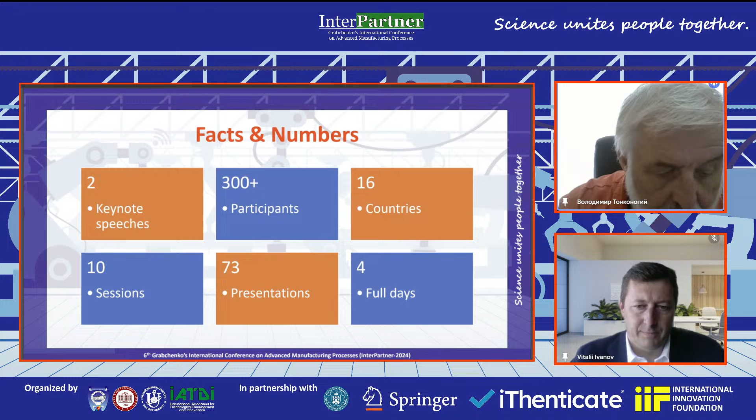The full text papers will be published in the book series Lecture Notes in Mechanical Engineering, titled Advanced Manufacturing Processes 6, Selected Papers from the 6th Grabchenko's International Conference on Advanced Manufacturing Processes. The expected date of publication is December 2024. Thank you very much to the editors for their efforts and support in bringing this publication to life.

I would like to express our heartfelt gratitude for the invaluable contribution of our session chairs during the conference. Your expertise, professionalism, and dedication ensured the sessions ran smoothly, providing an engaging platform for insightful discussions.

It is a true honor to work alongside the remarkable InterPartner team. Your dedication, professionalism, and commitment have made it possible to deliver such a successful event on time. I sincerely appreciate the effort each of you has put in. Together, we have created an environment that fosters exchange and innovation. Thank you for making this conference not only possible but also exceptional.